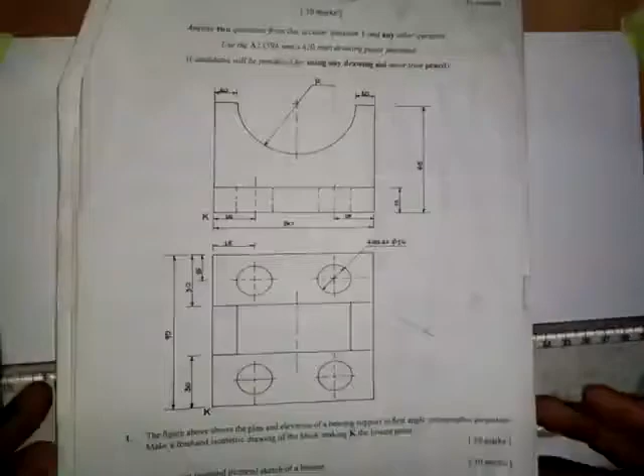And this is another question that was given to the candidates of this particular year to make it freehand sketching. That is to produce the isometric view of this object free-handed. Now, I've shown you how you can make a freehand sketch of this object.

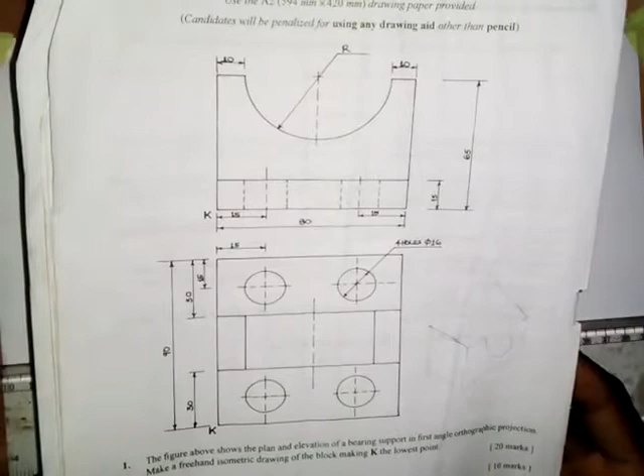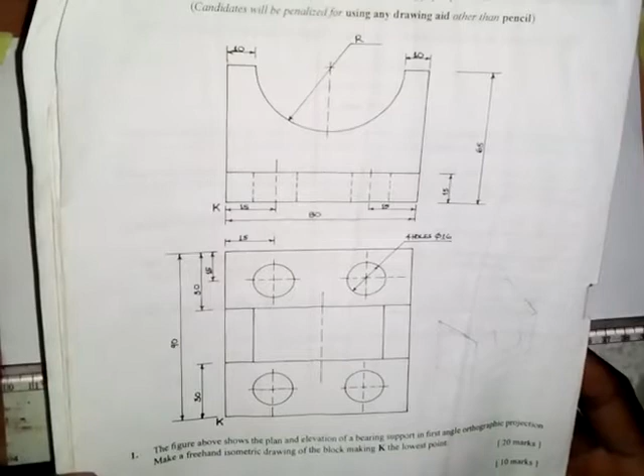But now I want to use instruments, as I said in one of the videos that I made in converting orthographic views to isometric view using instruments, of that particular object that was given to the candidates to make a freehand sketch. As I said over there, from my experience, I've seen a question that was given to candidates of a particular year to make a freehand sketch, and a year before or a year after, some candidates were asked to produce its isometric view with the use of instruments.

So that's why I've taken a decision to show you how you can produce the isometric view of this object using your instruments, because they can repeat it and you'll be asked to produce the isometric view of the object with the use of instruments.

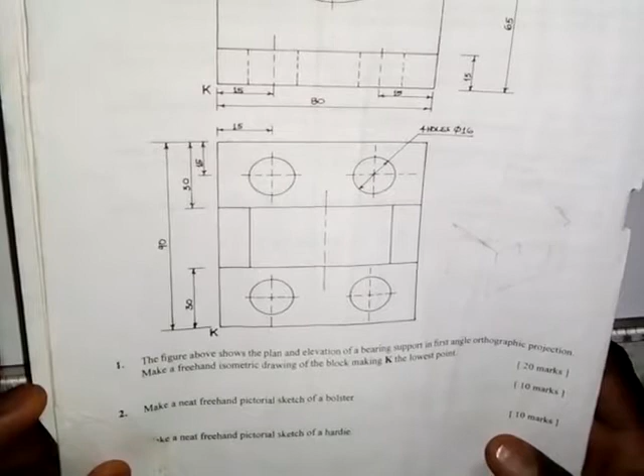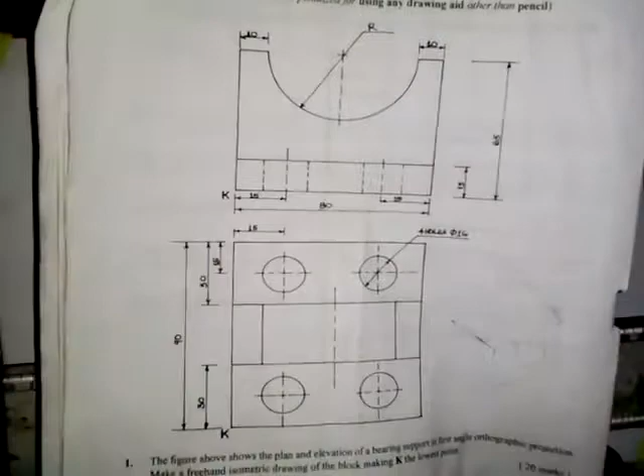Now, as written here, the figure above shows the plan and elevation of a bearing support in first angle orthographic projection. Make a freehand isometric drawing of the block, making K the lowest point. We are not producing this free-handed, but we want to use instruments to do it, as I've explained before. Now, this is the front view and this is the top view, or this is the front elevation and this is the plan.

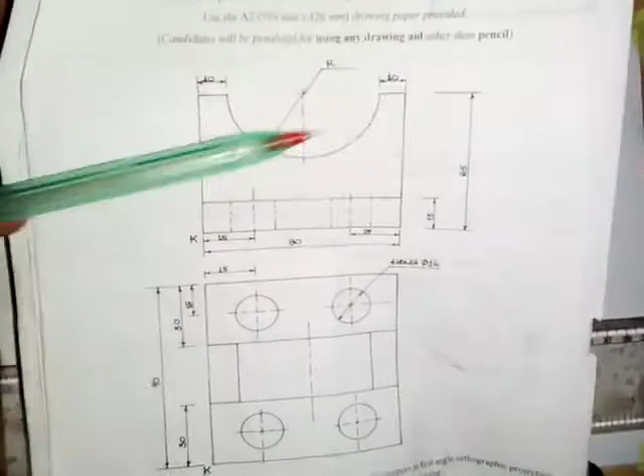So the total distance from here to here is 80 millimeters. Also from here to here is 80 millimeters. Distance from here to here is 15 millimeters, and from here to here is also 15 millimeters. From here to here is 15 millimeters, and the height from here to here is 65 millimeters. From here to here is 10 millimeters. From here to here is also 10 millimeters.

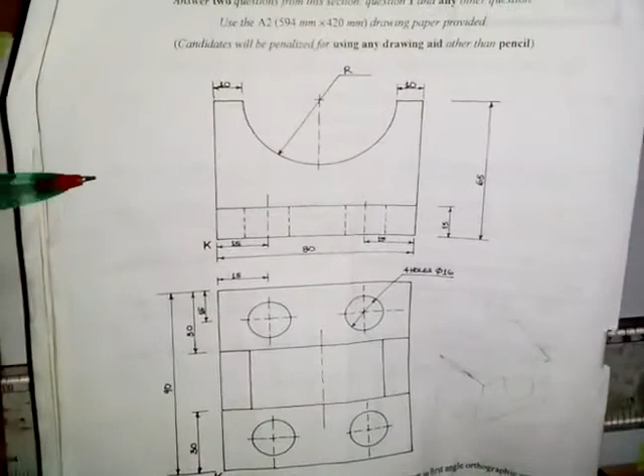Looking at what we have here, if the total distance is 80, and from here to here is 10, and from here to here is 10, if we add this 10 and this 10 together, that gives us 20. We subtract 20 from 80, that gives us 60. So distance from this point to this point is 60 millimeters. 60 divided by 2 gives us 30. It means the radius of this semicircle is 30 millimeters. Then coming down to the plan, distance from here to here is 90 millimeters.

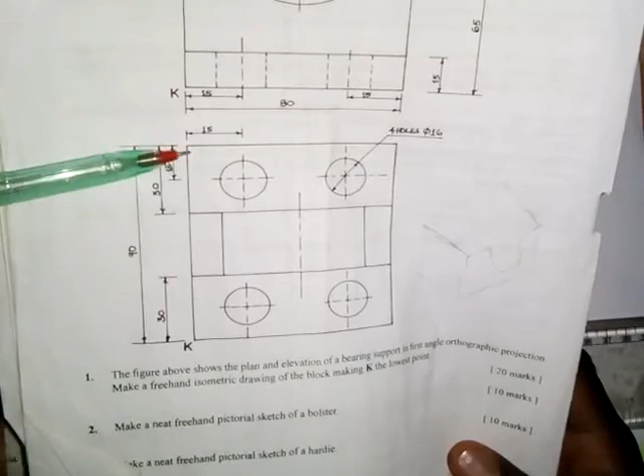Distance from here to here is 30 millimeters. From here to here is 30 millimeters. And the distance of the center of this circle from this point here is 15 millimeters. Also, distance from here to here is 15 millimeters. Then we are told that the diameter of the 4 circles that we have here, 1, 2, 3, 4, is 16 millimeters.

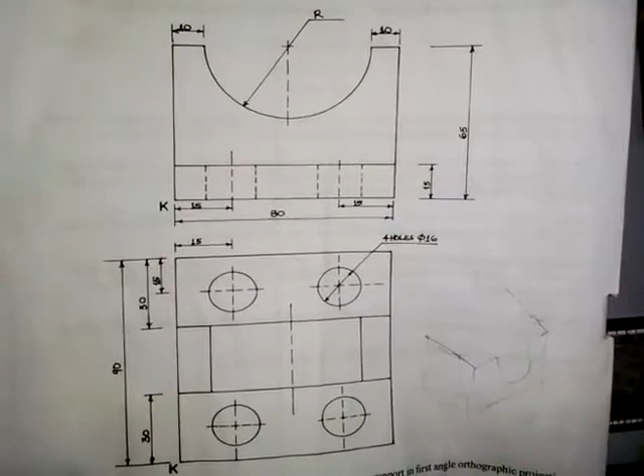So you can pause the video and screenshot the diagram so that you can practice it. It may be the question that will be given to you in your exam. Okay, now let's look at how we can solve the problem.

So the first thing to do is to draw a horizontal line here. Draw a horizontal line like this. Then with a 30-degree set square, draw a line in this direction, and then draw a line in this direction, like this.

All right, so let's start with the base, this part. Distance from here to here is 15 millimeters. So here we are going to draw a vertical line.

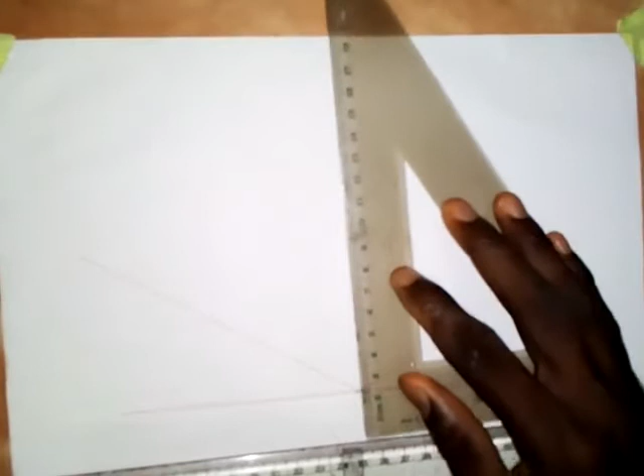So draw a vertical line at this point. And as you can see, the distance from here to here is 90 millimeters. From here to here is 90 millimeters, and from here to here is 80 millimeters. So that 80 millimeters, we are taking it on this side.

So take 80 millimeters from, so this is 80 millimeters. And we take 90 millimeters here. So this is 90 millimeters. Okay. Now, so here we draw a vertical line. Draw a vertical line here. And you come here also, you draw a vertical line here.

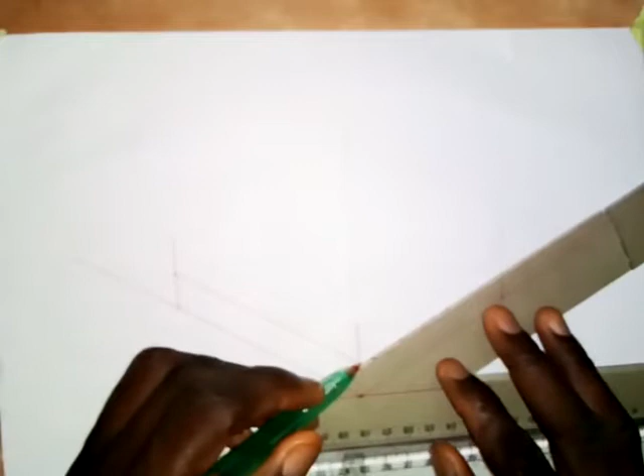Alright, so the next thing that we are going to do is to take 15 millimeters. So take 15 millimeters from here. So this is 15 millimeters. So we transfer this. Okay.

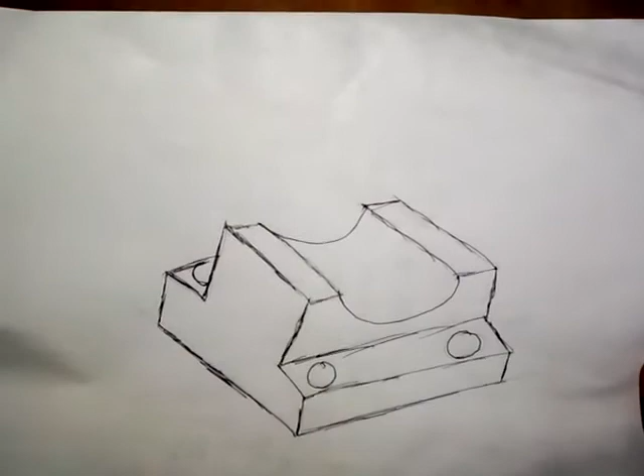All right. As I usually advise, whenever you are given orthographic views of an object and you are asked to produce its isometric view, you should try as much as possible to sketch its isometric view before you start. And that is what I have done here. So this is what we want to produce. So what I'm doing here first is that I'm producing this base that we have here. This base, that's what I want to bring out first.

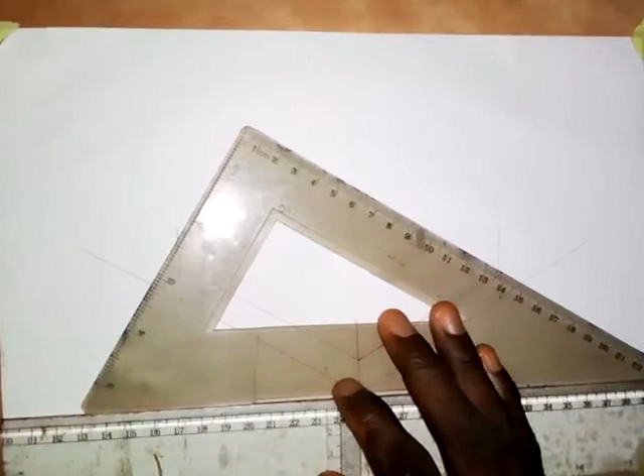So I want you to understand that. So distance from here to here is 15 millimeters, and that's what I've done here. So I want to complete it. So I intentionally paused the video for me to make the freehand sketch. If I'm doing it myself, I don't need to sketch the isometric view. I'll just go on and construct, but because you are still learning, you may need to sketch the isometric view before you begin to draw.

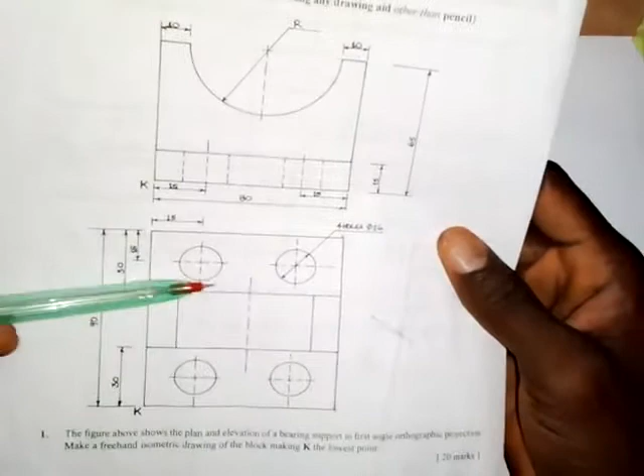So I've produced the base. So this is the base now. So this shape here is placed in the middle. So this is its thickness. Distance from here to here is its thickness, and that's what I did here. So distance from here to here is the thickness of that shape in the middle.

So then this line that we see here is this line here. And this same line that we have here, we also have it here. So distance from here to here is the distance from here to here. That's what we have there.

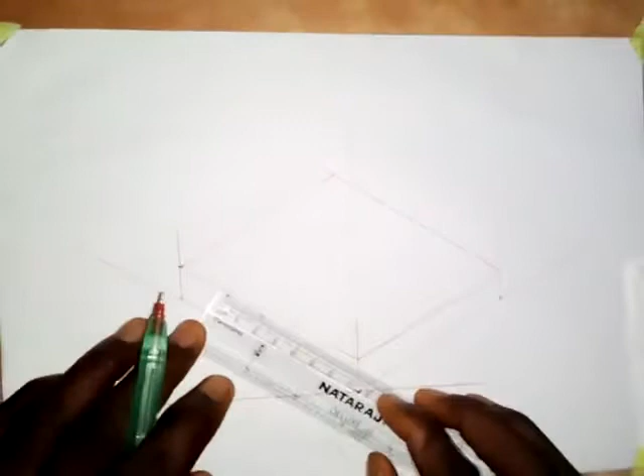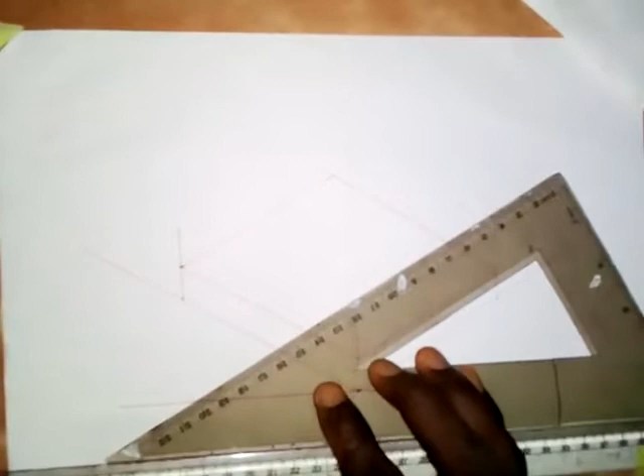So now the next thing that I want to do is, as we have that from here to here is 30, from here to here is 30, I will take a measurement of 30 millimeters. So this is 30 millimeters, and this is 30 millimeters here. So I will transfer this to the other side. Also, I will transfer this to the other side.

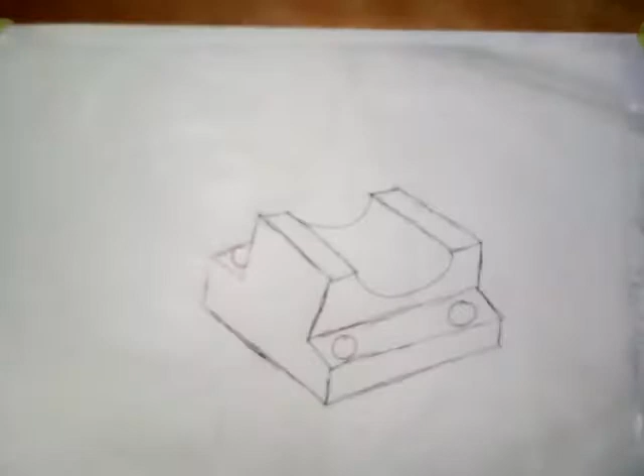All right, so the next thing that I'm going to do here is that I want to produce the 4 circles. Okay, so look, as we have here, the distance of this edge from the center of this circle is 15. From here to the center of the circle is 15. So I will take a measurement of 15 millimeters.

So don't forget that we have 4 circles. So this is 15 millimeters here. I will also take 15 millimeters from here to here. Okay, then I will come here. I will take 15 millimeters from here to here, and 15 millimeters from here to here. Okay, so I will transfer this to the other side.

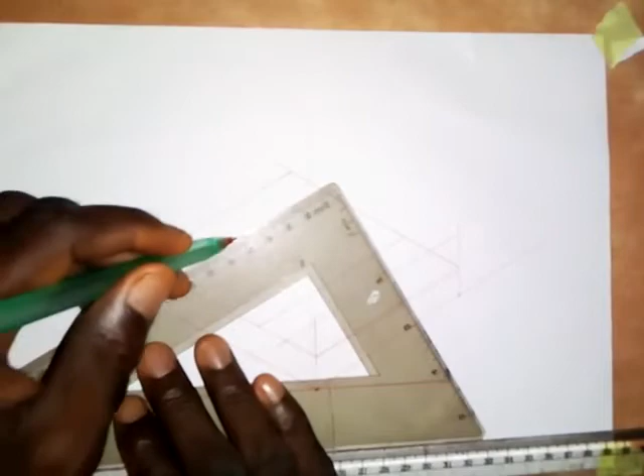So transfer this to the other side like this. Now we also transfer this to the other side. Then we'll transfer these ones. So transfer this to this side. Then transfer this to this side.

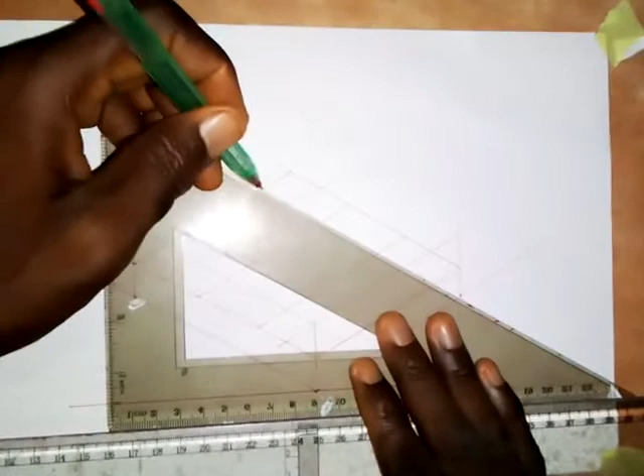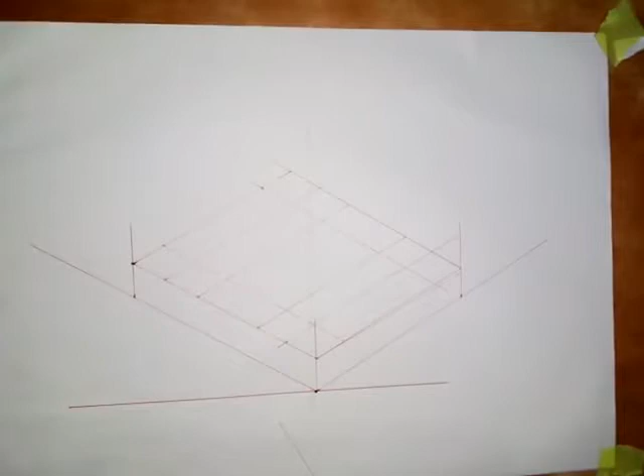Alright, so the next thing I'm going to do: as we have been told, the diameter of each of the circles is 16 millimeters. So with my ruler, 16 by 2, that is 8. So I will take 8 millimeters to this side.

Okay. So I take 8 millimeters. So there is 8 millimeters. Take 8 millimeters to this side, and also I will take 8 millimeters to this side. So I'm going to pause the video and take the distance. Alright, the 4 squares have been produced.

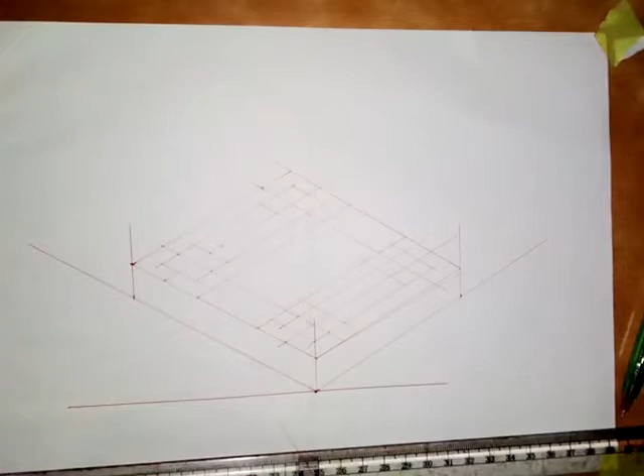So the next thing that we are going to do is that when it comes to something like this, okay, before I draw the circle, let me leave this, because it may happen that I may not need to draw all the circles. I need to draw this one, these two. I need to draw the circles, but these ones I'm doubting if they are going to appear in our work, but I'm going to pen it for now. So I'll come back and do that later.

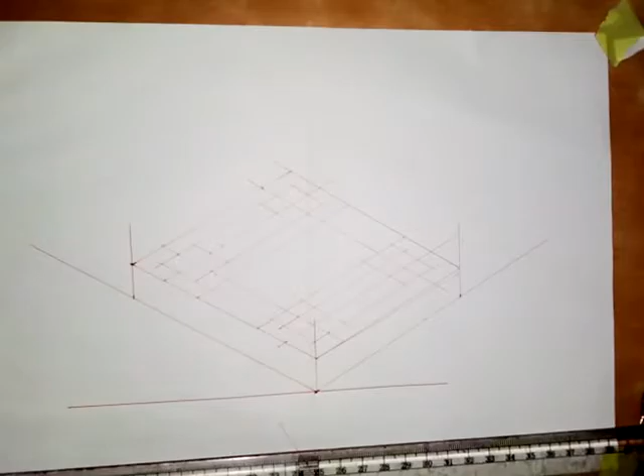So the next thing that I want to do is that I want to bring out this shape here, this shape in the middle. I want to bring it out, and don't forget that distance from this point to this point will also be 30. That means distance from here to here will be 30, and that's what we have left in the middle here. From here to here is 30 millimeters.

So all I need to do now is that I will need to draw a vertical line from this point. So produce a vertical line up here, and here also from this point. From this point here, draw a vertical line, and from this point here, draw a vertical line. Here also from this point, I will draw a vertical line from here.

Okay, so let's look at the dimensions here. As we have that from this point to this point here is 65, and from here to here is 15. So 15 from 65, that will give us 50. That means I'm going to take a measurement of 50 millimeters from this point up. So this is 50 millimeters. But before that, I will also take 50 millimeters here.

There is something that I want to do here. So this is 50 millimeters. So first of all, I will transfer this 50 millimeters, this one at the back, to the other side. Transfer this to the other side like this. Okay. Now the next thing that I'm going to do is that distance from here to here is 80 millimeters. So I will divide this 80 millimeters by 2.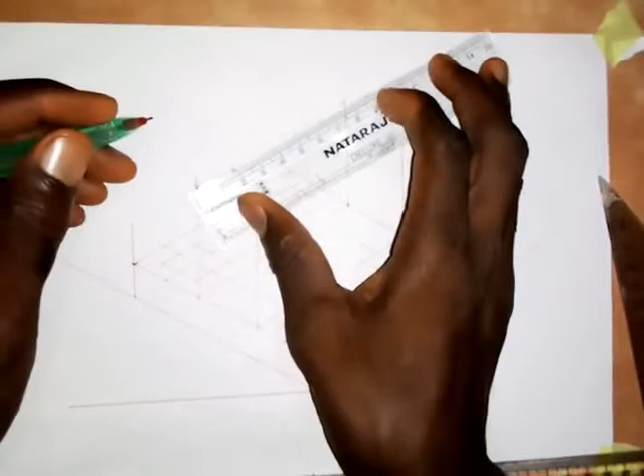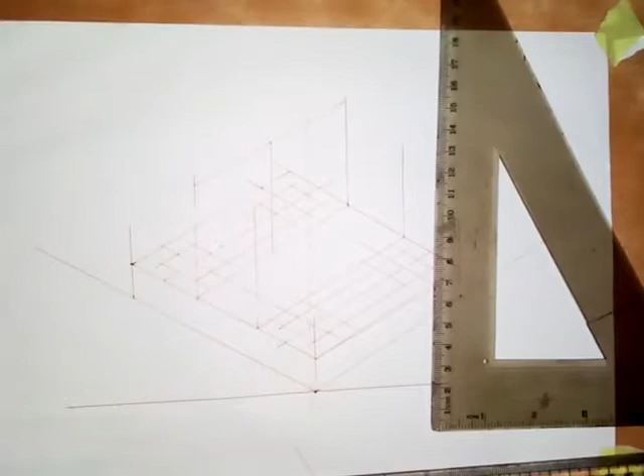Okay. Alright, so draw a vertical line down here. Alright, so as I've said, the radius of the circle is 30 millimeters. So I'm going to take a measurement of 30 millimeters down. Then I will transfer this to the other side.

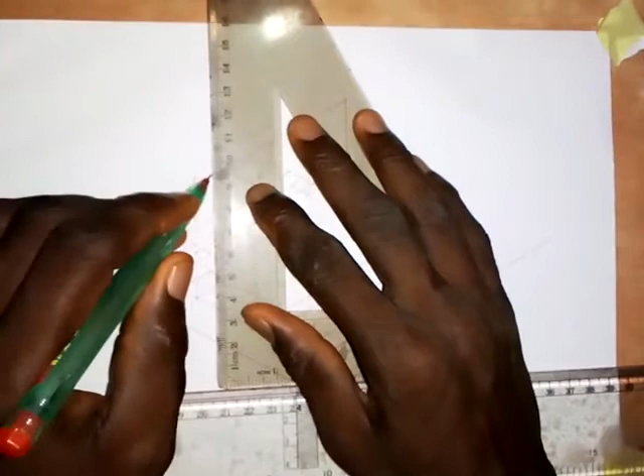Okay, so then I will also take 30 millimeters, as the radius is 30 millimeters. So I will take 30 millimeters from here to here. This is 30. So now I will also take 30 from here to here. This is 30. So produce a vertical line down. Okay. Also I will produce a vertical line down here.

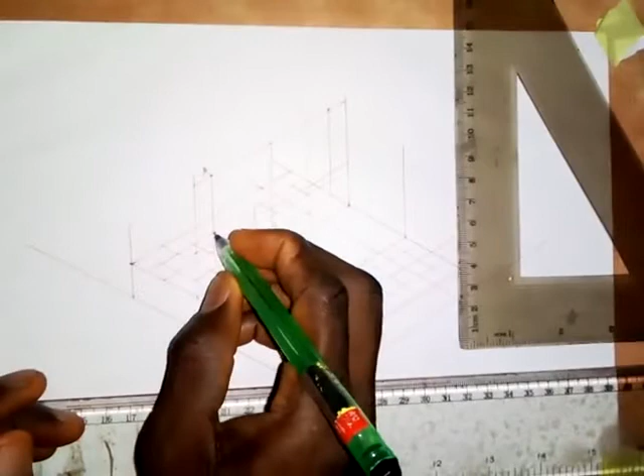So let me label the points. I think the work is somehow looking rough. So we have a point here. Let me call this point 1. Or let me call it A. So this is A and this is point B. And this point I will call it point C. And this point I will call it point D.

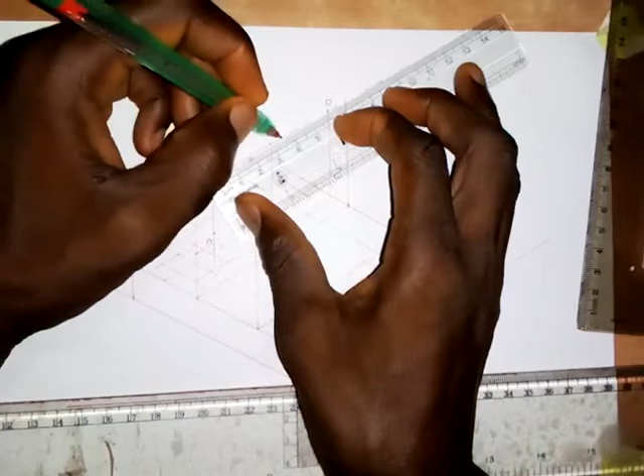Alright, so these 30 millimeters that we have here and here, we are going to divide into a number of equal parts. So I'm going to divide into 6 equal parts. So this is 1, 2, 3, 4, 5, that is 6. So that is 5 millimeters. This is 1, 2, 3, 4, 5, and that is the 6th one.

So we are going to draw a vertical line down to this point. Here also vertical line. I believe that you know how to draw an isometric circle when you are using this method. I've explained that in one of my videos, okay, on isometric circle.

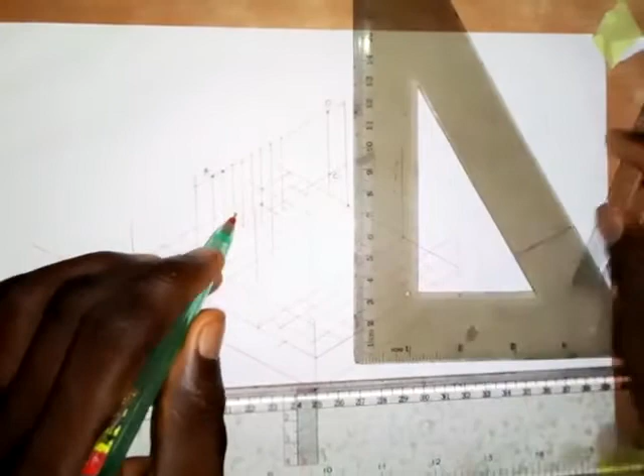The work is looking rough, so alright, I'm going to pause the video and produce this isometric circle. So this is the center. I'm going to number this as 1, this is 2, this is 3, this is 4, this is 5, and this is 6.

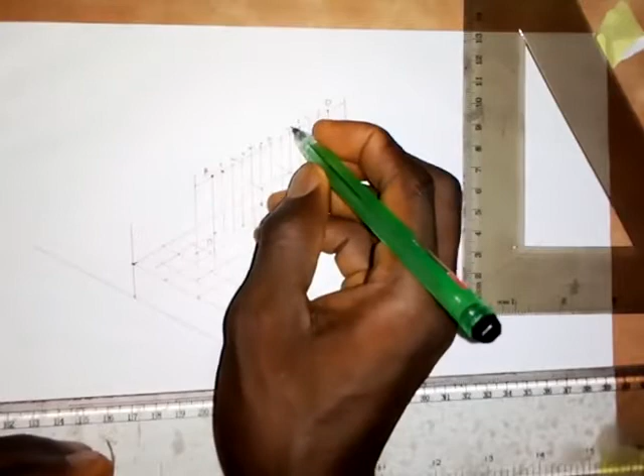So here is also 1, 2, 3, 4, 5. So 0. So this point, okay, we are producing it to here. I'm going to pause it, and okay, maybe before I pause, let me show you what I want to do here. Just take a short distance from here to here like this, and then draw a vertical line here. Draw a vertical line like this.

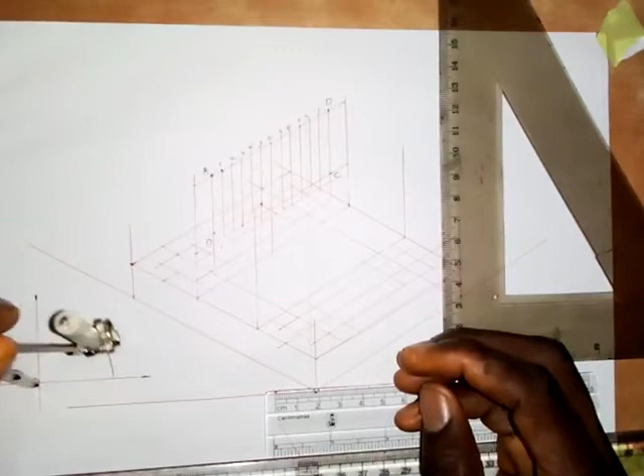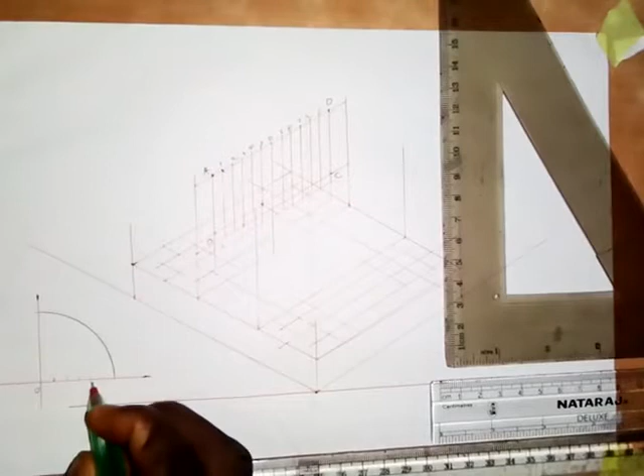So with your compass, take a measurement of 30 millimeters like this. Put it at this point and draw an arc like this. That is a quadrant, a quarter of a circle. So here we are going to divide this into 6 as we have done in the main object. So this is 1, 2, 3, 4, 5, 6. So this should be 0. So this is 1, 2, 3, 4, 5. So this point is part of it.

Okay. Now we are going to draw a vertical line on each of these points. So erect a vertical line here. Here you erect a vertical line. Here you erect a vertical line. Here you erect a vertical line, and also here you erect a vertical line.

Okay, so the next thing that we are going to do is that, with your compass, put your compass at this point on 1 and extend to where the vertical line touched the arc from line 1. So put it at 1 here. Okay, so this is 1. So you make an arc here on this line. So put that 1 here. Make an arc here on line 1.

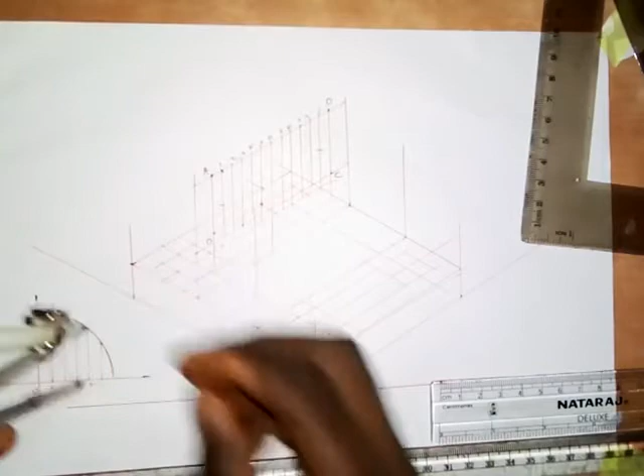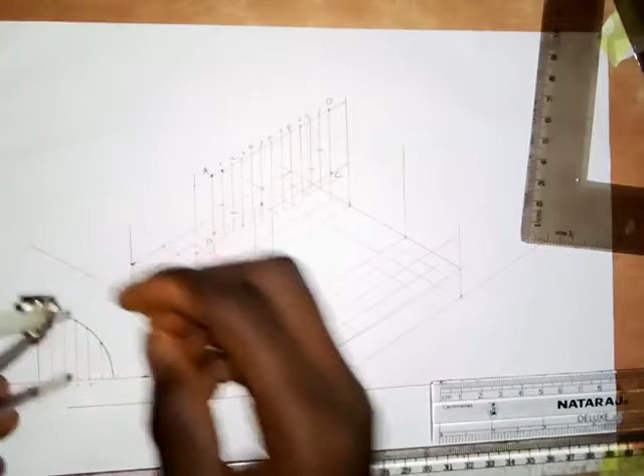Then take 2. So extend it up like this. Put it on line 2 here. So make an arc here. And you put it on line 2 here. You also make an arc on line 2 here. Then 3. So extend it up here. Okay. So put it here on 3. So make an arc here. And then you put it on 3 here. Make an arc. Then put it on 4.

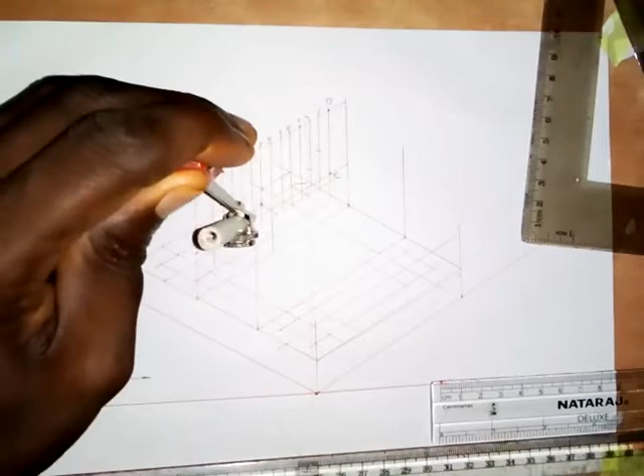So bring it to 4 here. So make an arc on this line. Put that 4 here. Make an arc on this line. Then 5. So put the distance, put it on 5 here. So make an arc here. And put it on 5 here. Make an arc here.

Alright, so all these points we are going to join them together with the use of a French curve. So we have these points. We are going to join them together with the use of a French curve, but I'm not going to join them together now because everything is not going to show in the work.

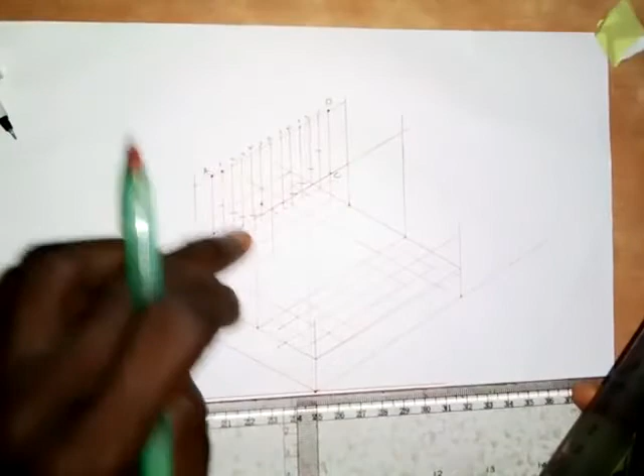So the next thing I want to do now is that this 50 that I've drawn at the front here, I will transfer this. I still need to extend this vertical line and to extend this vertical line. So I need to transfer this to the other side. So I will transfer this to the other side like this. Okay. So the next thing, I can use this one to get what I have here.

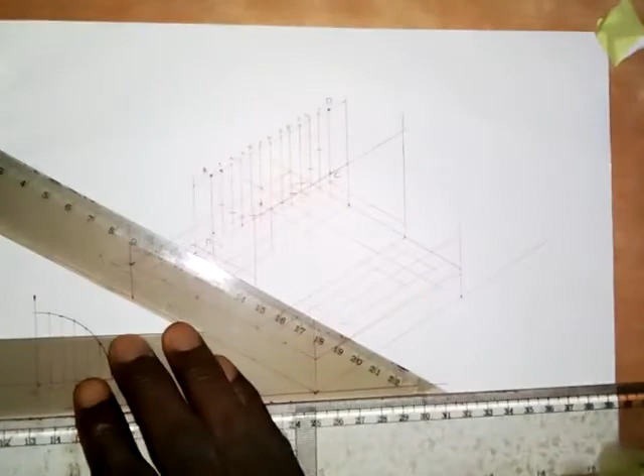So what I'm going to do now is that I will transfer this 30 that we have here. This 30, I will transfer it to this side. So transfer it to this side. Okay. Then, so this is the 30. Okay.

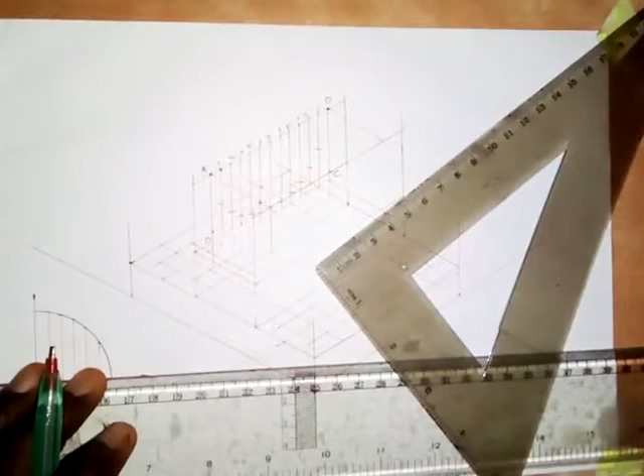Alright, so I can transfer this from this point. I will transfer this point A to this side. The work is looking rough. Now I transfer this to this side. Okay. Then I transfer the midpoint here to this side. So that means at this point we have what? We have 0.

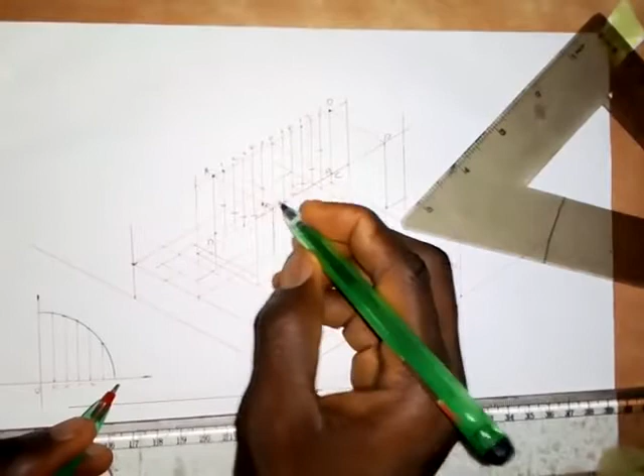And this is where we have D, and this point. So on this point we have A here at the front. So this is point B, and this is point C here. So I'm going to divide this also into, okay, we actually divide into 6 equal parts. So that's what we did. So I'm going to divide this also into 6 equal parts.

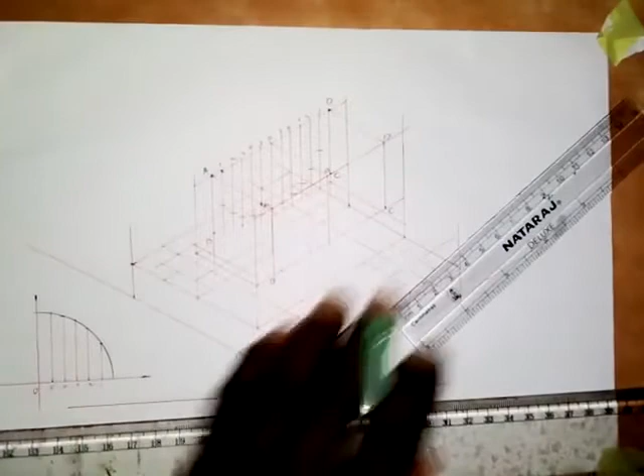That is, this is 1, 2, 3, 4, 5. That is 6. This is 1, 2, 3, 4, 5. So the sixth one is there. So I'm going to erect vertical lines on each of these points. A vertical line on each point. Okay.

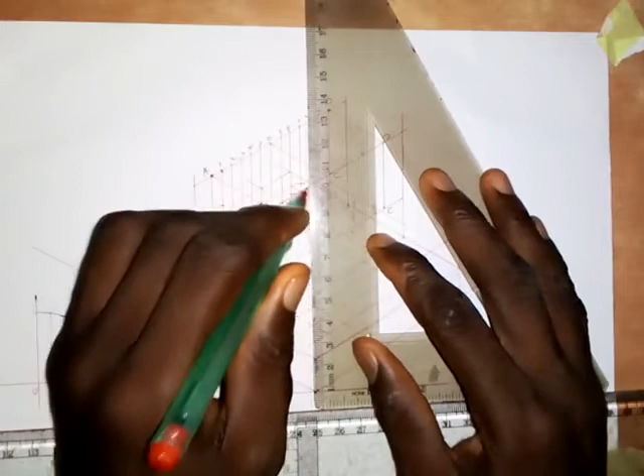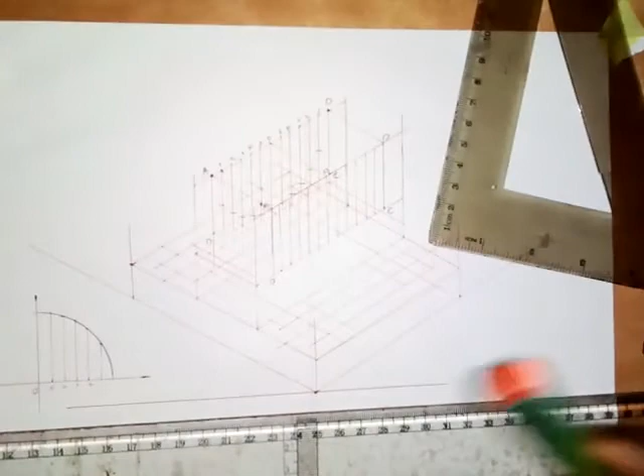And the work is looking rough, but for me it's also looking rough, but you can see what I'm doing here. All right, so the next thing that we are going to do is that we also number this: this is 1, this is 2, this is 3, this is 4, this is 5, and this is 0 here. So here we have 0, and this is 1, 2, 3, 4, and 5. So we also do the same thing that we did for the other one.

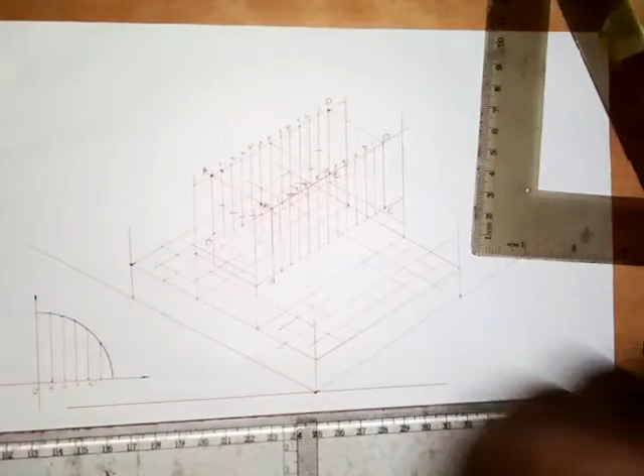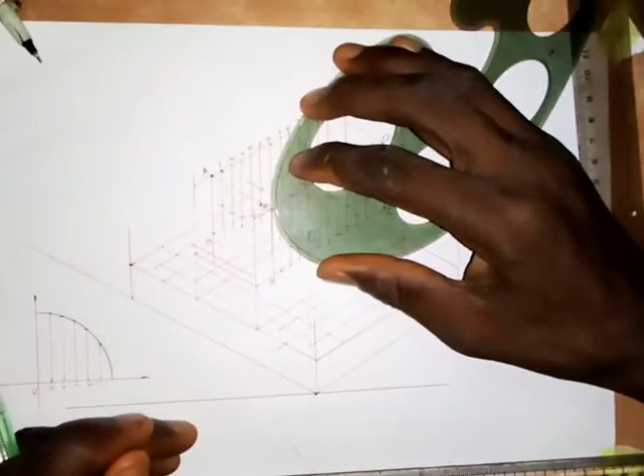So here we take 1 here. All right, so here I've located all the points. So the next thing I'm going to do is to join them together with the use of my French curve. So we have to join all the points together with the use of French curve. So let me produce the one at the front first, because that's much more important.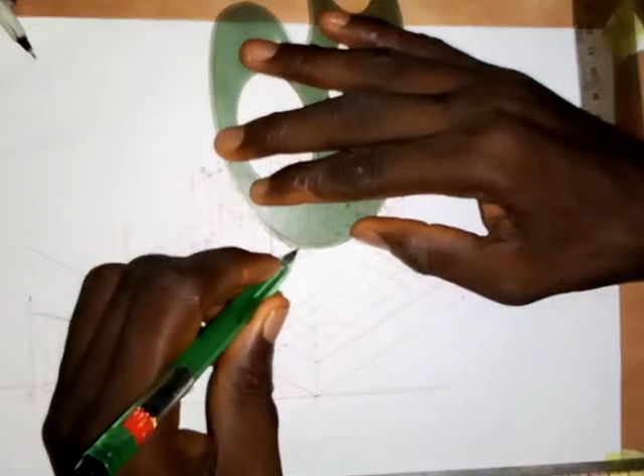Okay. So you take it little by little. All right. So when I complete this, I will pause the video and do that of the one at the back. All right. So this is the one at the front. So the one at the back.

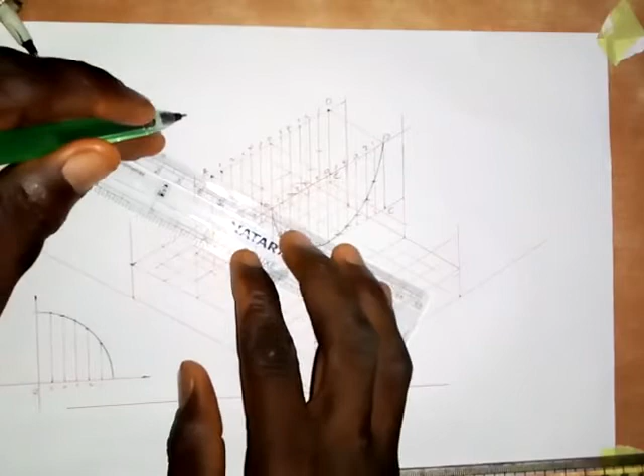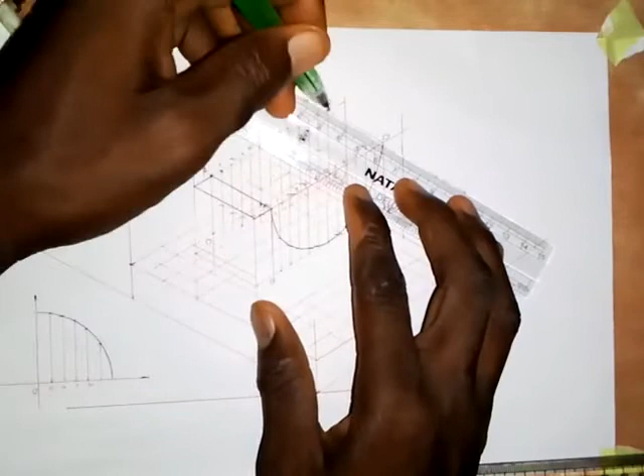That means if you look at what we have here, let me show you something. So if I join this together to produce this edge here, and I join this together to produce this edge here, that means the curve at this part has been covered. Let me show you. So I join this point together and I join this together like this.

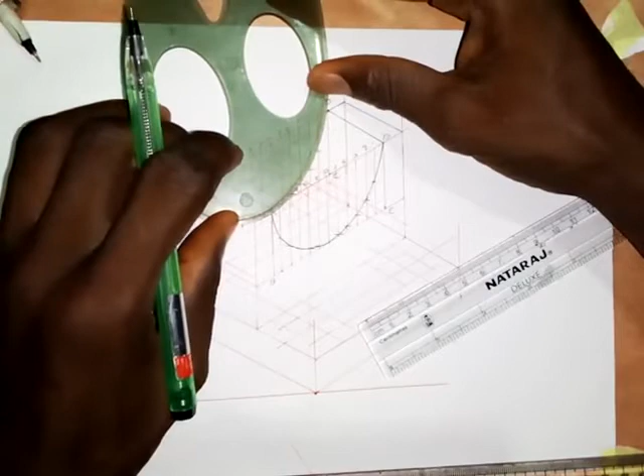So the curve that we have on this part is not going to show. That's why I said I will not draw the curve there until I produce the one at the front, and that's what I've done. So if I join this together with this, it will go like this. So that is the part that we show. That's what we are going to have there.

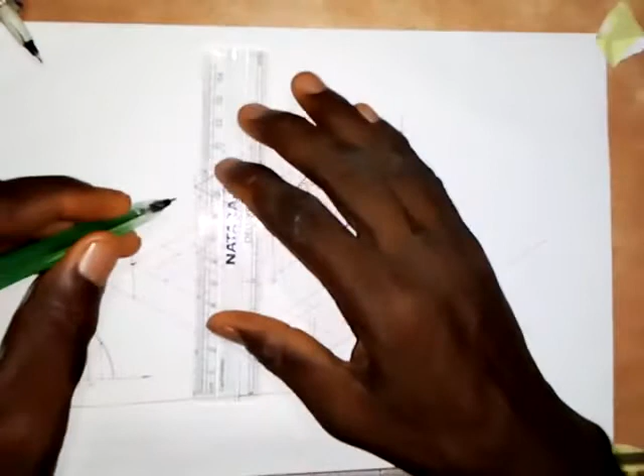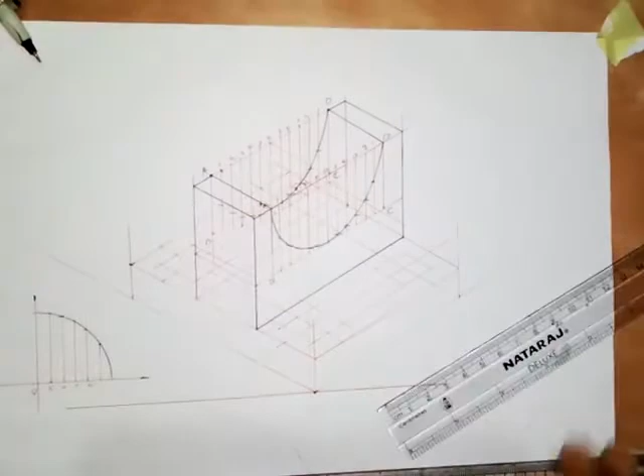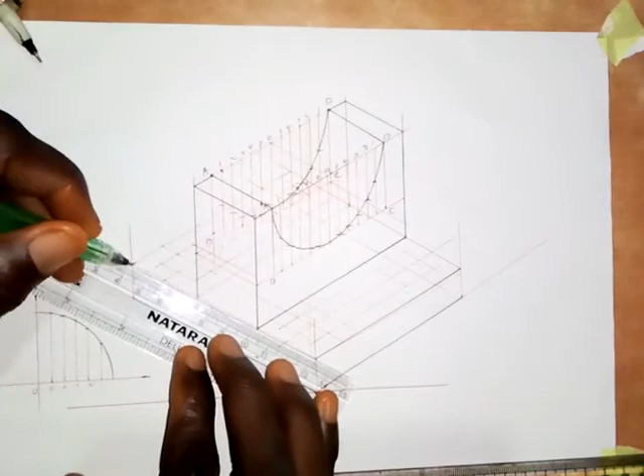So the next thing I need to do here is to join this together like this, and then join this together with this. Okay, so then we have this joined together like this. So let me show you the part that we have gotten. All right, so if we look at what we have done, the circle that we have here will not show because it has been hidden by this part. So that's why I said I will not draw the circle until I draw this one.

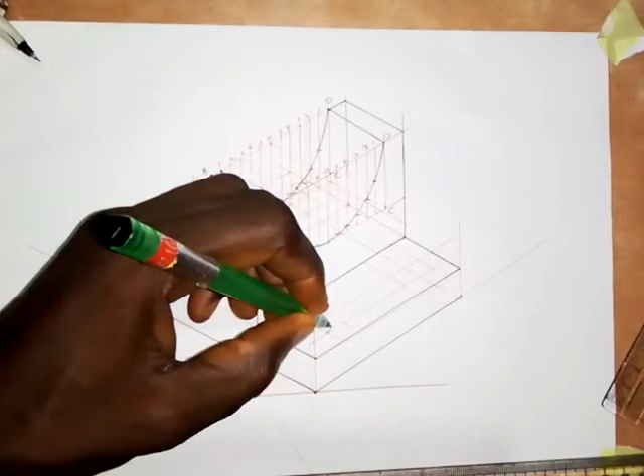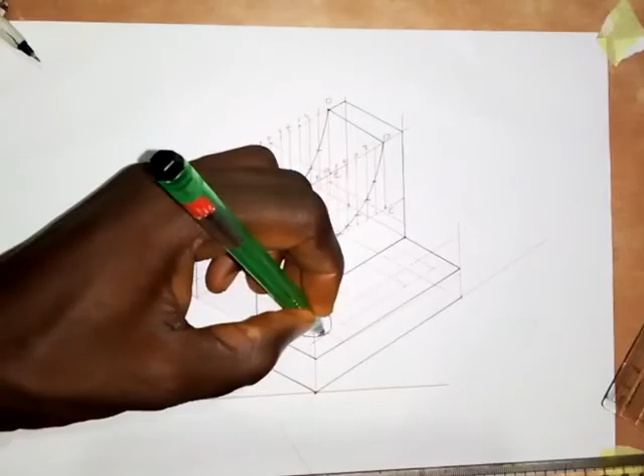So the next thing I'm going to do is to draw the circles. For the circles, I'll use my hand to bring this out, because this is not really big. Don't forget that an isometric circle is an ellipse, so it's not a perfect circle. So then I will also use my hand to bring this out.

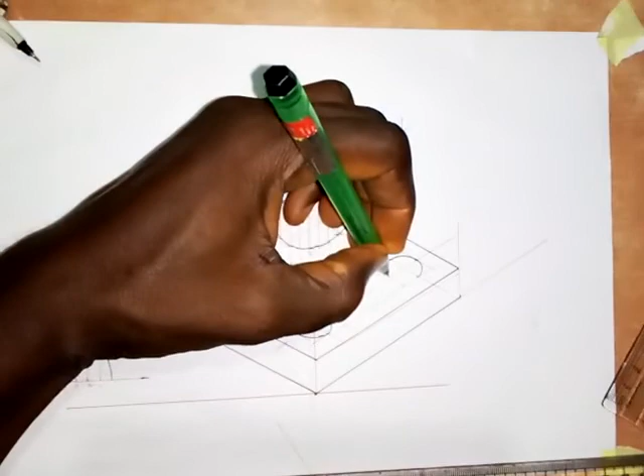All right, so then on this side, it's only part of the circle that will be shown. It's a little part of it that will be shown, and that's what I've done here. So that's all that we can see in that part. So then I'll make this a thick line, and make this a thick line. All right, I didn't even pause the video.

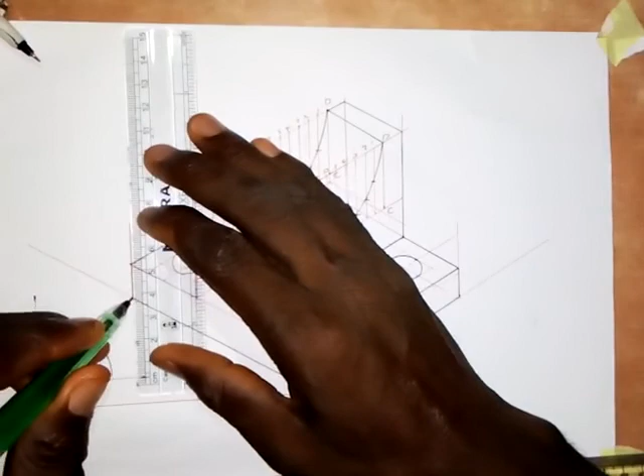All right, so this is the solution to the question. This is what we are going to get. So all you need to do is to practice it, and when you continue practicing it, you master it. So this is the diagram. You can pause and screenshot so that you can have the diagram.